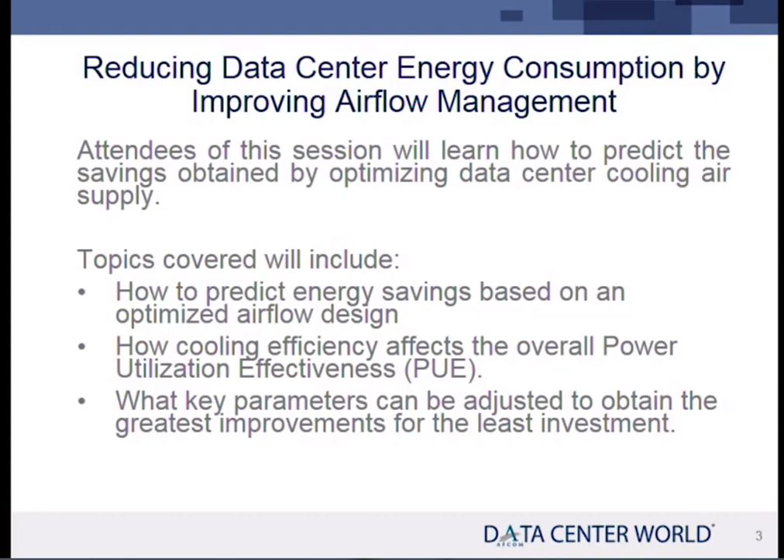Even in liquid systems, there's airflow. So, at some point, particularly with rear door heat exchangers, there's airflow. So we're going to be talking about airflow today. We're going to be talking about it as it relates to PUE. And I'm going to also be discussing with you a new specification called TC 90.4. 90.4 is a spec for energy efficiency as well, and it relates to PUE. We're going to talk a little bit about it.

A little bit of background on myself before we get too far. Paul Bemis. I have a background in mechanical engineering and electrical engineering. Undergrad mechanical, graduate work electrical. I was in the computer business for many years. I worked for Hewlett-Packard, electronics packaging first. Later on, parallel processing, high-performance computing. Ended up on the business side and ended up working in simulation software later in my career, which is where I am now.

So let's talk about first PUE. Most everybody here knows what it is. I'm just doing a level set here because I don't know where you all are with respect to understanding these things. PUE is a fairly good metric. It suffers from a few things. It is in the numerator total facility divided by IT energy. Total facility includes, of course, the IT equipment itself plus all the stuff extra to make that data center work. Okay, so that's the ratio.

I know there's a pointer here somewhere. Most of this cost. It did work. It worked a while ago.

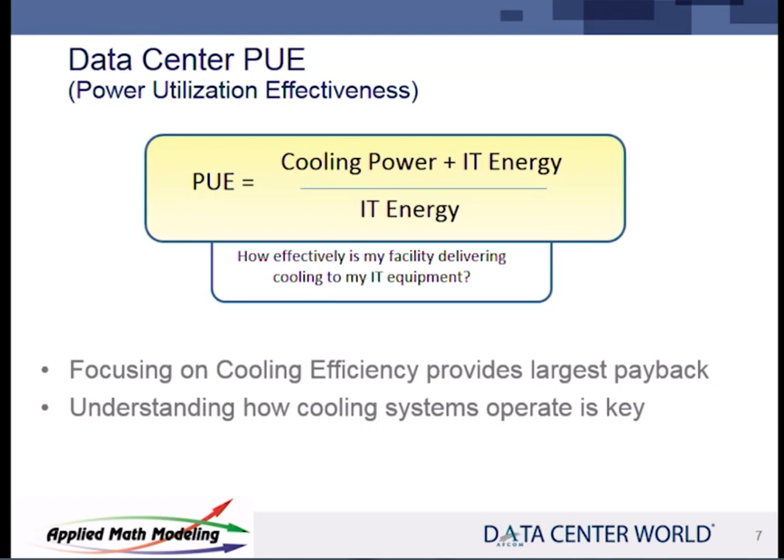So it's an interesting spec that's getting quite a bit of attention, I think, these days. But let's take this thing apart a little bit. Total cooling power equals fan power. These are the fans that are in the room. These are the fans typically, if it's a chilled water system, that are on the fan coils. They're often called CRAHs. They're air handlers, computer room air handler.

They're often also called CRACs, computer room air conditioner, although that generally is referred to with a DX system, so it's got the compressor in it. That's generally what people refer to. So it's the air handler in the room, plus whatever's in that room, the cooling load, which is all the IT load and any leakage from the PDUs and everything else, divided by the efficiency of the heat pump, coefficient of performance. How efficient is the heat rejection system?

So data center is fairly simple. It's heat in the room, and you're going to try to dump it back out. Now, what you'd like to do is do that at a ratio that's pretty good, right? A ratio that's pretty good is around 4. That means for every kilowatt of power that I put into the data center, it takes me about 0.25 kilowatts to pump it back out.

That's a good day. That's pretty good. I've seen them much, much worse than that. I've seen them at 1 to 1. For every kilowatt you put in the room, it takes another kilowatt to get it out. And airflow generally is the reason why. So the total cooling load includes the racks themselves.

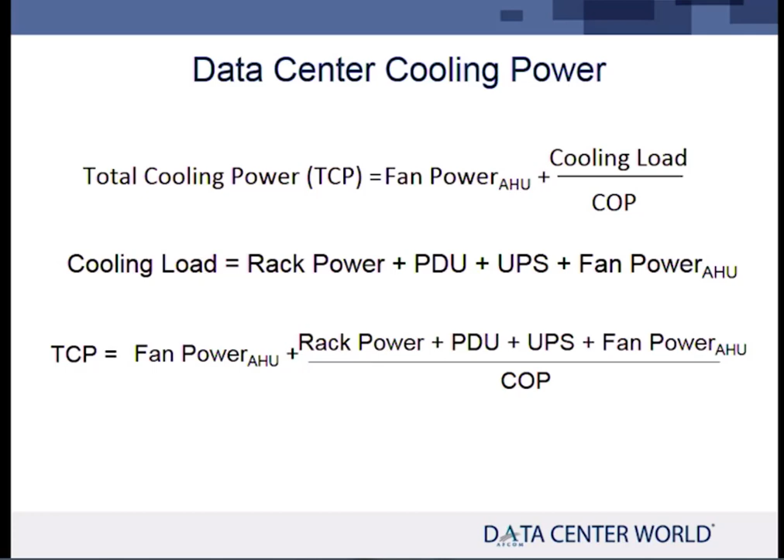Now in the TC 90.4 spec, they add a few other things in here as well. They're adding in, of course, any cooling tower fans. They're including pumps. So all things related to cooling go into that calculation. So cooling system efficiency is really shaft power. It's the power required to pump the heat back out. And it's usually done through shaft power.

It's done through a mechanical pump. It's done through a compressor. That's generally how it's done. Whether it's a DX unit or it's a chiller, it's mechanical. It spins a shaft, that drives a compressor. The coefficient of performance is how efficient that chiller is.

Now, you'll see chiller efficiencies in documentation listed kind of funny. They go kilowatts per ton. I love this thing, kilowatts per ton. Oh, can't you give me the same units? Right, because you convert a ton to a kilowatt. It's a ratio about 3.517, something terrible, right, that you can convert it. And then it's kilowatts per kilowatts, and that is the coefficient of performance. And generally, as I said, on a good day, they run about 4.

If they've got economizers, of course, they can be much higher than that. And they are not a constant. It does vary based on outdoor air temperature. It varies based on wet bulb temperature and things like that. So it varies as a function of time. It is not a constant, although you can develop an average for a year if you measure it. And generally we have to make some assumptions somewhere, so we work with an average COP.

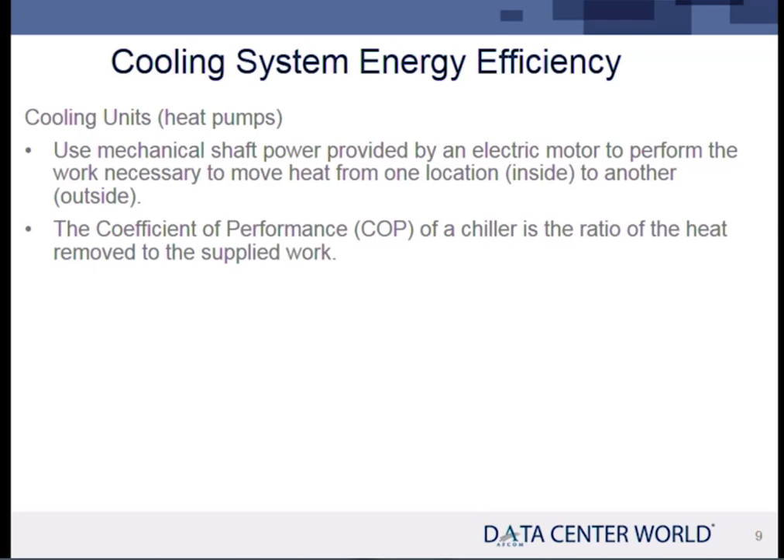So for most data centers, I find they run in the range of 2 to 3. If you look at that TC 90.4 spec, they have something they call the MLC, mechanical load component or calculation. It's really the inverse of the COP is what it is, and it's a system level COP. In other words, if you look at just the chiller number alone, it's a best case situation.

Kilowatts per ton. You look at the chiller spec, you say, well, it's got a ratio of about 3. The COP is 3 or 4. Well, that's under a laboratory test. That's under the best of conditions. And it's not a system level number. In other words, it doesn't include the water tower pump. It doesn't include the pumps pumping. It doesn't include the fans.

So what we're trying to get at really here is the overall system efficiency, the overall cooling system efficiency for your specific data center. That's really what we're after, and that's what they're chasing with TC 90.4. So it's a good specification. I think you're going to see more from it. But at the end of the day, COP is just the amount of work required to dump heat. It's just a ratio.

It's true for all devices. It's true for your refrigerator. It's true for your air conditioner. It's true for your data center. Coefficient of performance is something you should get a feel for. You should try to understand what yours is at your data center. It's fairly easy to figure out because you can go to your UPS and see how much load you have going into the room, at least the IT load going into the room.

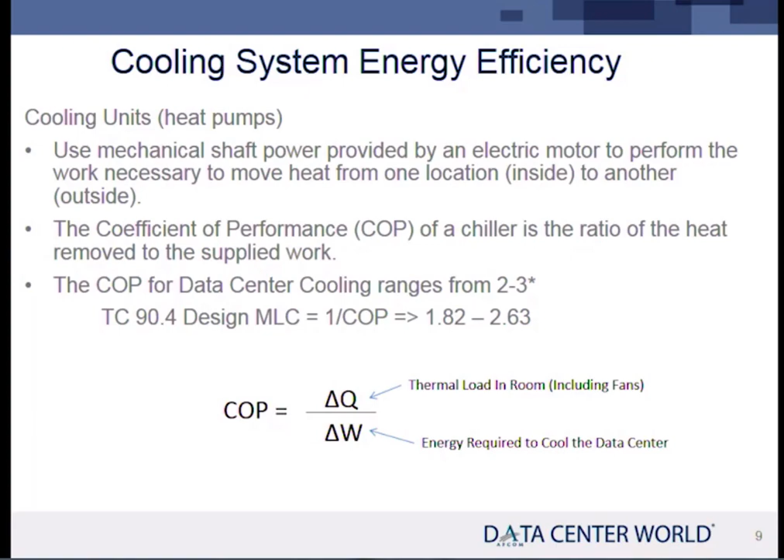So it's important to kind of understand where you are with respect to efficiency in your own data center. And the guidelines that TC 90.4 put in place give you, as I showed here, a ratio of 1.8 to 2.6. It's not too bad. Pretty close to the average that I see in data centers normally.

Okay? Now, the reason that it's important that we talk about airflow is because it influences chiller efficiency. The chiller is most influenced by return air temperature because it's trying to dump heat to the outside atmosphere. And therefore, its temperature to dump needs to be higher than the outside atmosphere. And the bigger the difference, the better off it does. Heat exchangers work that way. They're more efficient when the delta T gets higher.

It's not completely linear. I've been chased around on this before. But we have to make some assumptions. And for all practical purposes, you can assume it's fairly linear. You're going to get about 3.5% efficiency improvement in your chiller for about every 1.8 degrees Fahrenheit. Those are tough numbers to remember. But you can think of it as 2 percent per degree. All right? And it's fairly flat in the range that we're talking about.

So if you can raise the set points of your data center, supply air temperature in particular, which makes the return air temperature higher, you're going to get more efficiency. If you raise it about 10 degrees, you're going to get about 20% efficiency improvement in your heat rejection system. It's about where it ends up being. Okay, so it's important to be able to raise your supply air temp.

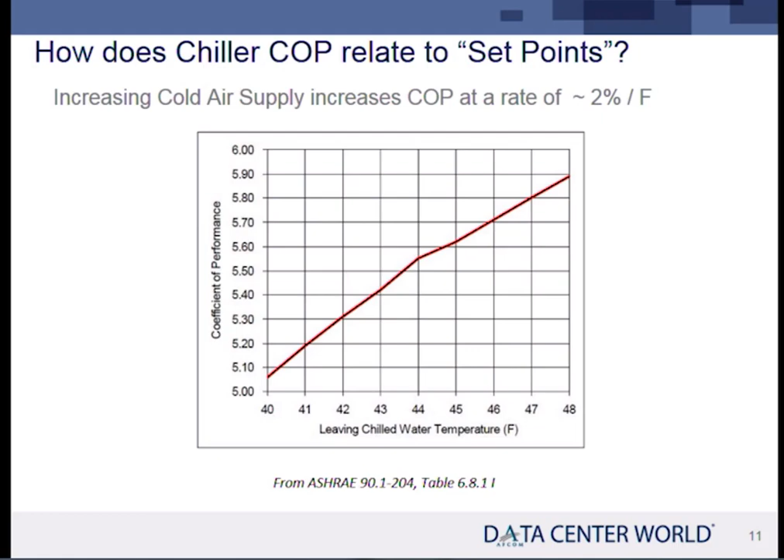So the first question you think about when you say raise supply air temp, am I going to have hot spots? Now the only way you'll know really that you're going to have hot spots is to model it, is to try it, have a mechanism for trying it out. And I am an advocate of modeling. I'm in the modeling business because it's airflow.

And managing that airflow and knowing where that air is going is very important to a couple different things. We talked about the heat exchanger, but also hot spots, getting the air to where it needs to go. You may have enough air coming out of the air handlers, but you got to get it to the right place if you're going to have it improve the efficiency of your center and if you want to try to raise the supply air temperature.

So a couple definitions here. Bypass airflow is too much air coming from the air handlers and it goes right around the rack. It doesn't go through it. In a perfect situation, you only want to deliver the amount of air necessary in order to cool your IT equipment. No more, just enough. Okay, and they have a ratio for that they've come up with called RTI, the Return Temperature Index. The amount of air being supplied should be equal to the amount of air that the servers want or need.

And no more, because if you have more, it's going to blow by the top, it's going to bypass, it's going to go back to the evaporator, and it's going to reduce the efficiency of that heat exchanger because the return air temps are too low. You want them high. You don't want to cool off the return temp.

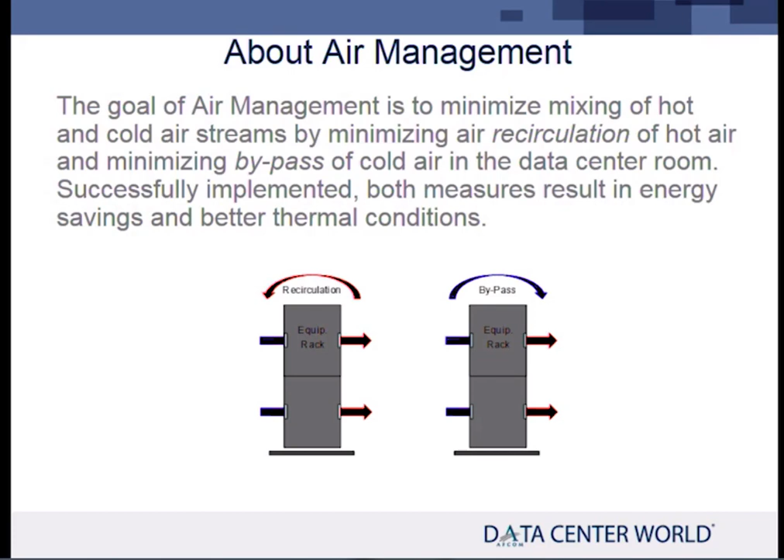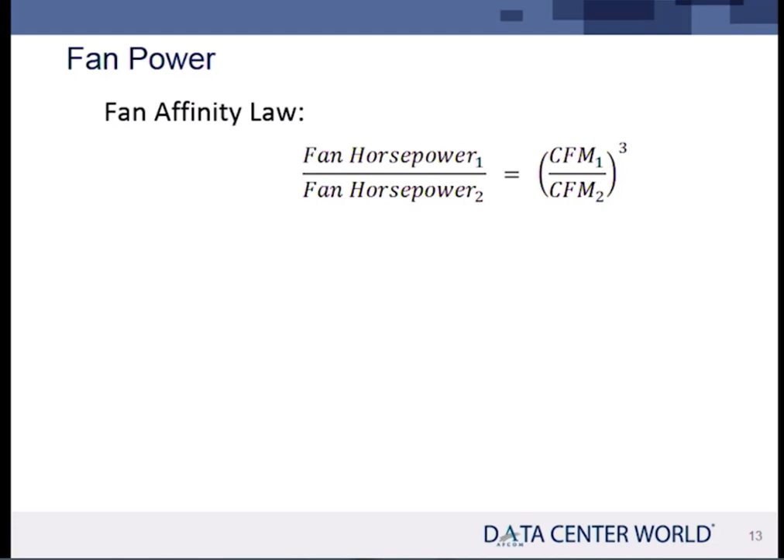Okay? So now the other thing to remember is the affinity law, or sometimes called the fan law, a well-known relationship as well. Specifically, the amount of energy required to drive a fan is related to the RPM of the fan cubed. In other words, the relationship is cubic. That's a big jump. So by reducing the amount of air going into the room, I get two benefits. One, my return air temps go up, which is good for the heat exchanger and good for the heat rejection system and improves the efficiency of it. Number two, the amount of energy required to drive the fans in the room drops by a cubic relationship. Well-known, understood fan law relationship here.

So if you reduce the fans by 20%, you reduce the energy that's required by 50%. Wow, that's a big hit. That's a big number. And this is where variable speed fans or EC modulated fans have become very popular because you can now begin to move the fan number down. For many years, this was a constant. We were stuck with what we had, and it didn't work very well.

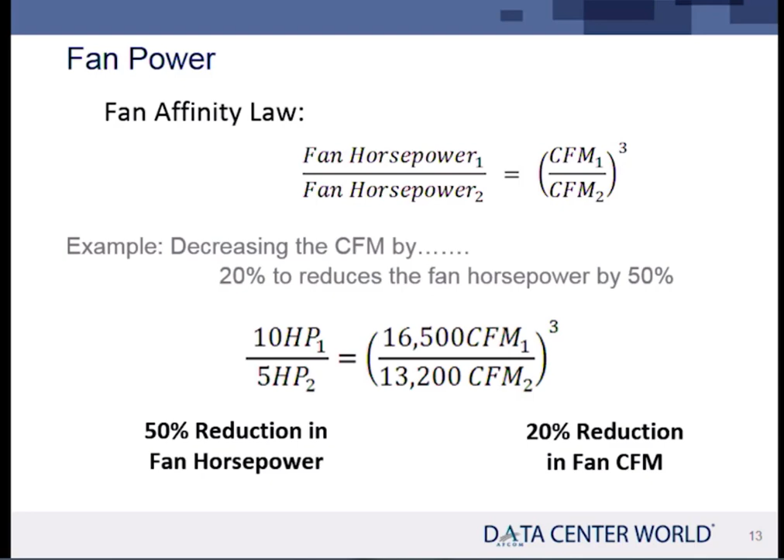Nowadays, the opportunity for EC fans or direct drive fans that can be modulated so that their speeds can go up and down based on a sensor can improve your situation greatly because it'll save you money in fans and also increase your return air temperatures. These two factors, the amount of air entering the room and the temperature of the air entering the room, are the two key parameters associated with saving energy in any data center, whether it's old or new.

Can we conclude that in an existing data center, replacing a normal analog fan with an EC fan unit, power consumption by that particular cooling unit will reduce by 50%? You can't assume it, no. The question he's asking is, if I move to EC fan and variable speed fan, can I assume energy savings? No, because you haven't yet dealt with the issue of air management.

You don't know if turning that fan down is going to cause problems with that server down at the end of the rack row. You don't know that because air has to get to that server, and that's an issue of trying to determine how to get it there, okay? So we'll talk about that a little bit more with respect to air management. But just changing them to variable speed fans isn't the answer.

And I've been in data centers where they've converted it all to variable speed fans, and I walk in and they're all running full tilt. They're all screaming. And I feel bad for the people who paid the money to do the conversion to the EC fans because they're not getting their money's worth out of it, because they didn't deal with the issue of airflow management. They were sold on this idea of saving energy, but no one ever followed all the way through to do the air management part.

Okay? So I mentioned earlier, rule of thumb, 125 per kilowatt.

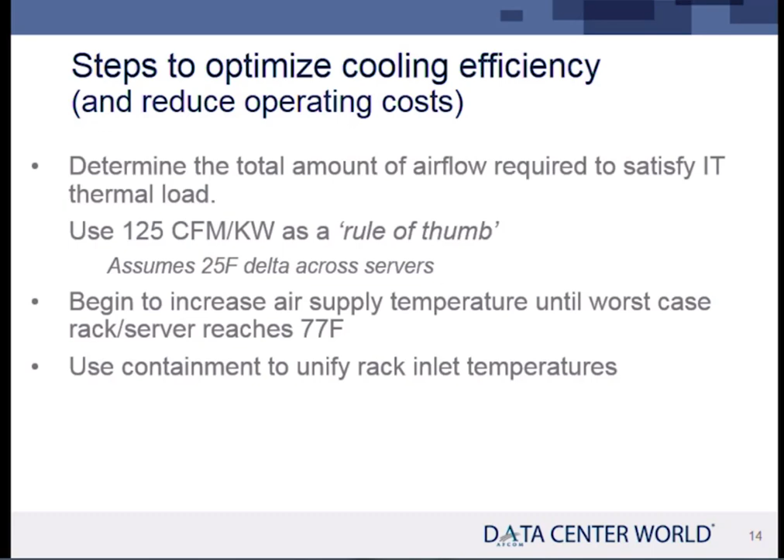Jeff's right. That's because PUE is not a great metric for energy efficiency in a data center. His point is that the fan in the PUE number, both in the numerator and denominator, is IT, and in the IT number is the fan, which I always wondered about too. What's the fan doing in there? But it is. Okay, so 77 degrees is really where you want to go. Using containment does help. It is not a panacea. I do another presentation called Containment is not a panacea, because it can bring its own set of problems in, particularly if you mix some rack rows with containment and others without it. I've seen that done a lot.

So we're going to do analysis here. I'm going to take you through a couple of examples. And the reason I'm doing this is to show you the mathematics of how to do this and show you the gains that can be made from it. And the other part of it that I think is important is that I'm going to show it to you at both full load and half load.

The other thing that ASHRAE 90.4 does is it gives a requirement to set the specification of energy efficiency at full load, which everybody designs for. I work with a lot of design build firms, and they're all working at max load. In other words, when I design a data center, I have to make sure it'll handle peak load. Great. Day one, I don't have peak load. Day one, I've got 10%, 20%. How efficient is it at 10% and 20%? No one's ever done the math. Answer is, it's not very efficient at all, right? Because the energy required to drive that chiller is going to be still quite high compared to the IT load.

So it's going to be pretty poor. So in the ASHRAE 90.4 spec, they have a 50% requirement in there. You have to test it at 50% load in addition to 100% load to see how it behaves itself, which I think is a good idea.

So we're going to have a 1 megawatt data center here. It's going to be natural convection with ceiling plenum return. We're going to do a baseline run on it. Always validate your models if you can. This is great to do on existing data centers, is go in and make a few samples to make sure that the model you built actually represents the real world. But in many cases, you haven't built it yet, so it's the best tool you have.

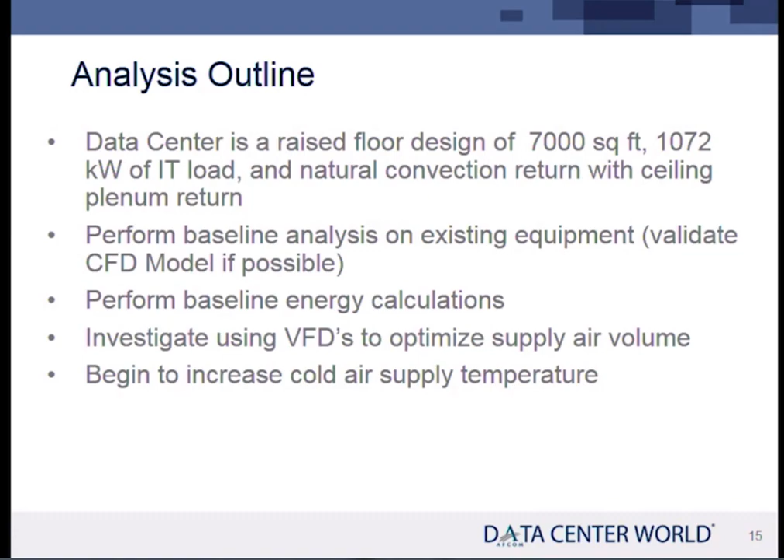The reason I point this one out is I've seen these perform pretty well. I've seen these kind of data centers with that kind of design operated at PUE of around 1.3, 1.25. Not too bad. And that's probably the most cost-effective solution you're going to get without going to full containment. And like I said, full containment starts to bring other issues in, pressure issues and airflow issues within the containment itself.

This one has no issue. It's really convective hot air. The hot air is coming out the backside of those racks and we're using buoyancy in our favor here. It's floating up into the ceiling and being sucked out. Pretty nice design, low-cost design, economical. Here we've got a load of about a megawatt, 160 racks. The rack demand, 134,000 CFM. Again, total IT load times 125 per kilowatt.

Is it perfect? No. But good engineering is based on calculated assumptions, right? We have to make some assumptions. Otherwise, we can't move forward. And then we test our assumptions and see if they're valid. 125 per kilowatt's pretty good. It's not perfect, but it's pretty good.

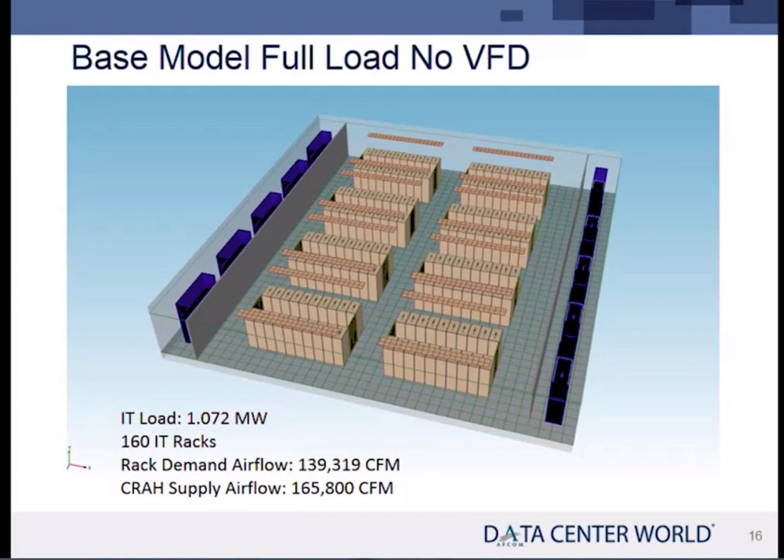The supply flow rate in this case, 165. So you see, I already have more air than I really need. I have 139 that I need for the racks. I'm delivering 165. So I know my ratio, my RTI ratio, is going to be below 100. It's not a one-to-one match, right out of the box.

Now, here I'm also beginning to look at energy. I want to know how much those fans are delivering. This is a Liebert. These are CW114s that I'm using, not 106s, sorry. And you can go to the spec. You can get this information online. Find out what your air handlers are running at.

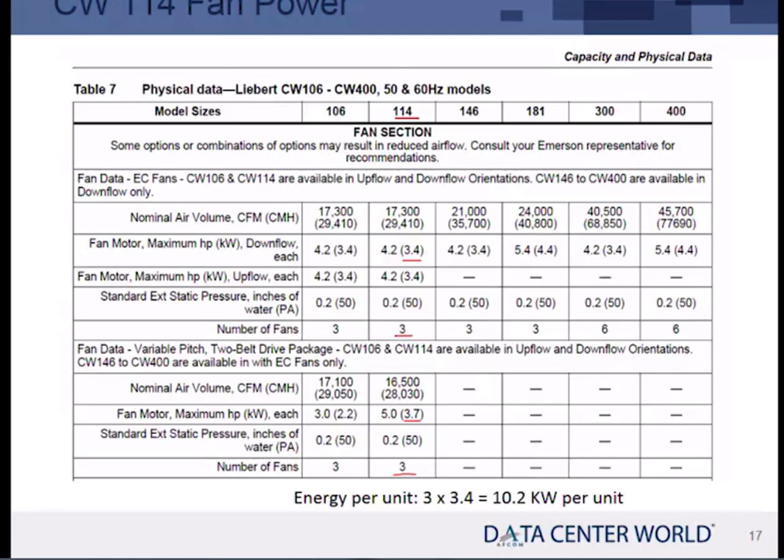In this case, we have 3 motors, and they're generating 3.4 kW per motor. And there's 3 motors, so I've got 10.2 kW per air handler. And you can enter that in as your start point, times the number of air handlers, of course. So there's quite a bit of energy going towards cooling itself.

Now this is some output from the simulator. I'm going to read this to you because it's pretty small. My RTI here is 84. That means, again, in the base case, I've got too much air coming into the room. That's when they're all on full tilt. All the units are running full. Too much air. Therefore, my ratio is below 100.

Now, I know I've got too much air. The problem, as I mentioned, it's going to cool off the return air to the heat exchangers, and that means my chiller is going to be less efficient. And the other 2 metrics that are popular if you take training like DCIM training, DCEP training, you will learn about these other 2 metrics, RCI high and low. RCI high is, do I have any hot spots? It's at 100%.

I don't have any hot spots. So there's no hot spots in this data center. I'm certainly cooling it well enough. But if you look at the RCI low, that's looking at the low temperature metric. It's at 21%. It's too cold.

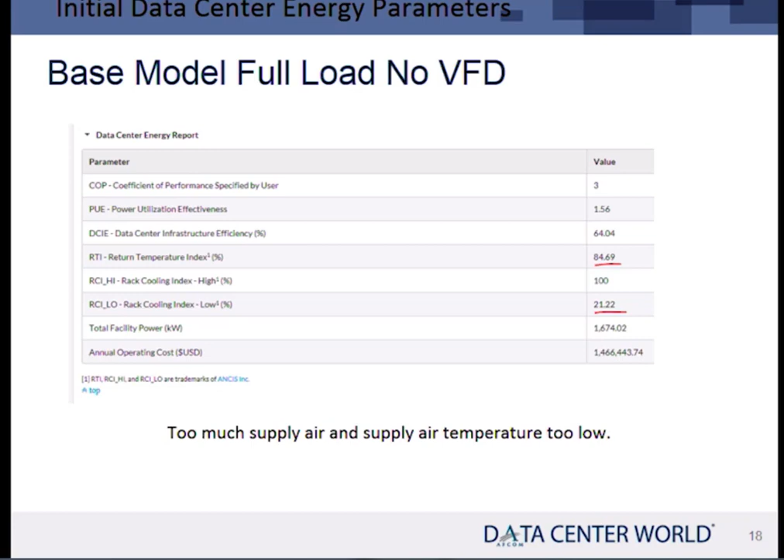I find a lot of data centers like this. Too much air being delivered at too low a temperature. And this is making the chiller go crazy, or the DX unit, or whatever it is, right? Because it's unhappy. It's not getting hot air back. It's still trying to deliver cold air, and it's working itself to death. That's a very common situation. Too much supply air, and supply air temperature is too low.

This is what the room looks like. These are rack inlets. They are colored in accordance to conformance to the ASHRAE spec. The ASHRAE spec for a recommended temperature inlet, which maxes at 80.6. And 64.4 is the minimum. So these should be all green, right? But they're blue because they're too cold. They're failing on low temperature.

Now, that doesn't kill your IT equipment because running them cold doesn't really hurt it, but it hurts your chiller and it hurts your heat rejection system. It means the energy consumption for that data center is huge because it's trying to deliver really, really cold air.

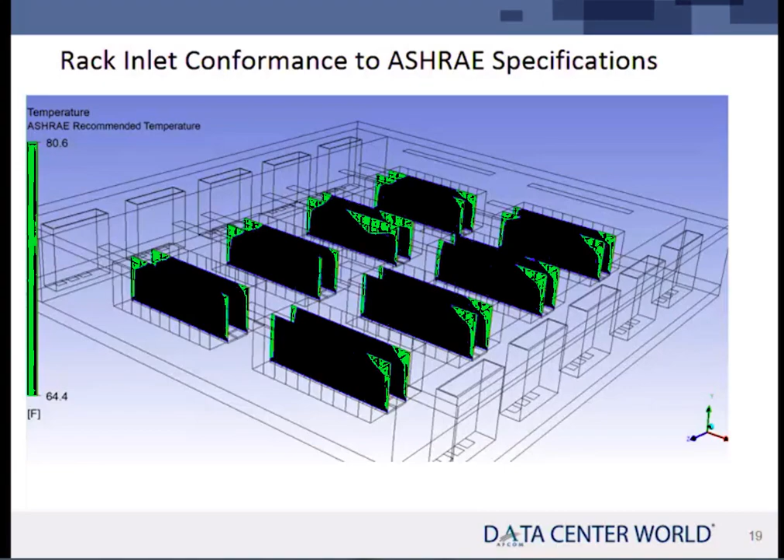The contours that you see here are not uncommon. We're delivering air through the middle, through the perforated tile. This is a raised floor data center. And you see the cold air coming up out of the floor, and as it gets to the top and it gets to the corners, it dissipates, and you don't have quite as much cold air there. So you do see a contour of temperature. That's a temperature plot. I wanted to also show you airflow coming back to the cooling units.

Now, these are what we call path lines of supply. They're coming out of the floor. So the thing about this kind of modeling, this is CFD modeling, computational fluid dynamics. It's used extensively in aerospace and the automotive industries, and we're using it here. And the good thing about it is it allows you to visualize the air. It allows you to physically see it.

And what we're doing here is we can see the air coming up out of those tiles and going up, and it should stop right at the inlet of those servers. It shouldn't go any further. If the air balance was perfect, if all I was delivering is what the system needed, there would be none of these returns going back. But you see they are. There's a few going back. I'm over-delivering air. I'm getting bypass airflow, and it's going back and it's cooling off my heat exchanger. And that's reducing my efficiency.

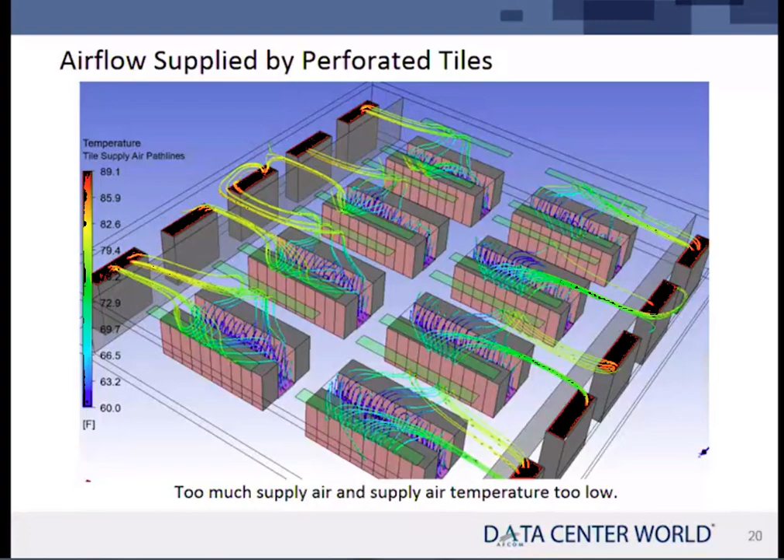So a perfect picture would be none of these returns going back, none of these yellow ones. And by the way, in yellow, I'm showing here a return temp of around 79 degrees, 80 degrees. Way too low. Remember, if my supply is 60, my return should be 80. If my supply is 70, my return should be around 90. There should be a 20-degree delta across the rack, if not more. It should be around 25, to be honest. The hotter the return, the better a heat exchanger performs. So we have too much supply air, and our supply temperature is too low.

So first step we do, implement VFDs. It's your point. Let's get control of the supply air so we can modulate it based on the amount the IT needs. This is a good thing because in the early days of your data center, you don't have a lot of load, but maybe over time load goes up. You'd like to have a way to scale up and down the cooling capability and efficiency, and so VFD is a good way to do that.

We're going to put temperature sensors in place on the racks to modulate the VFD. I like temperature sensors on racks. A lot of people do put pressure sensors under the floor to drive the VFD. And then they try to dial the floor pressure to be a certain level. This is a very common technique by people who put in air handlers. Use pressure to modulate the fan. The problem is the pressure is a proxy for temperature. It's a substitute. Really what we're interested in is temperature of the rack inlets. So what you really want to do is use temperature, which I have done in this case.

So I went ahead and did a run. This is a 1 megawatt data center, and the PUE dropped from 1.56 to 1.5. The RTI went to 90.28 from 84. It got better.

The RCI high stayed at 100, which means I still have no hot spots, but my RCI low is still 21. I'm too cold now, but at least I got the airflow a little better balanced. And by the way, the predicted cost dropped by 50 grand a year, just putting the VFDs in place and scaling them down a little bit. Okay? So things got better just from putting the VFDs in place, to your point.

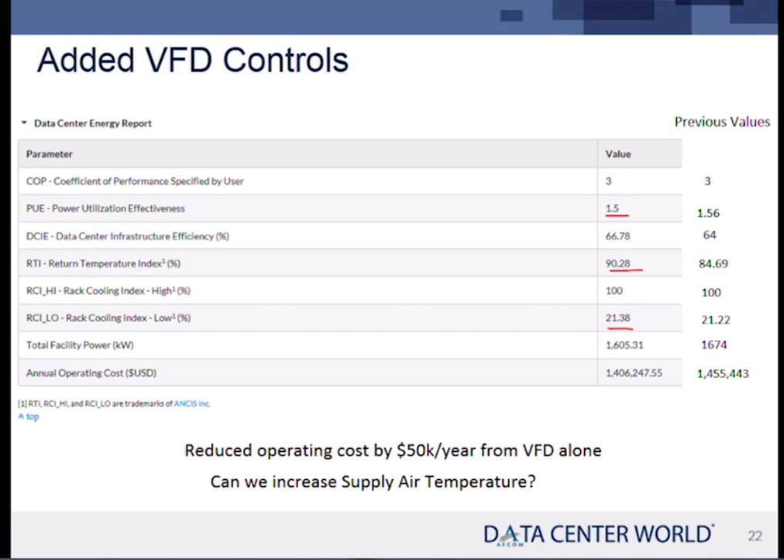So we don't have air management problems yet here, but we don't really know because we haven't turned up supply air temp yet. As you start to turn up supply air temp, you're going to see things start to get a little bit worse. So here's what they look like now. So we were able to save 50K a year from putting the VFDs in place. We got better efficiency just from fans alone.

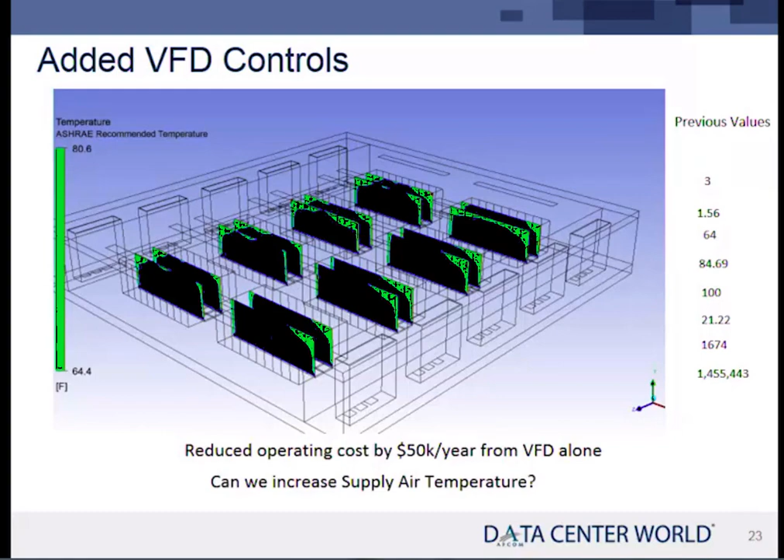Now the next step you always try to take is, can we begin to raise supply air temp? Using a modeling tool allows you to do that because you can try these what-if scenarios and experiment without the downside effect of burning up anybody's equipment. Doing it in the physical world, trial and error in the physical world can be a little more risky.

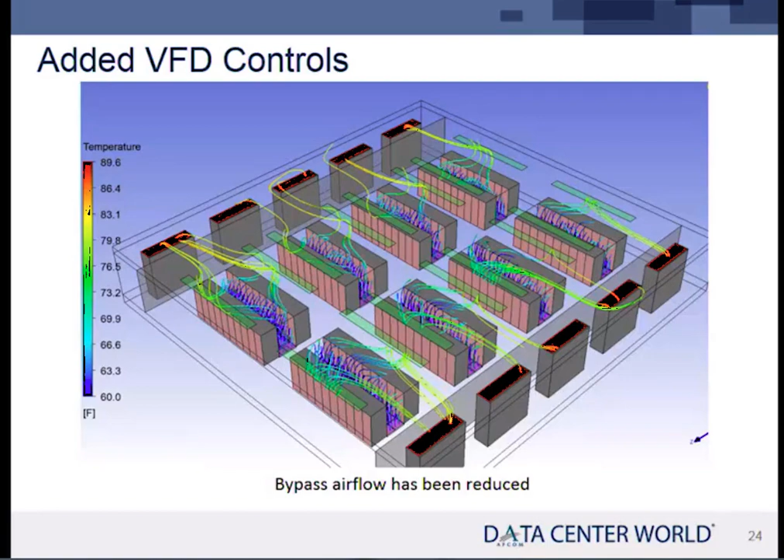Now here you see in this plot, this is the returns again, and you see there's fewer of these. There's still a few, I'm not perfect in my delivery. So I got a few path lines going back, but certainly bypass airflow has been reduced and things are in much better shape. Next step, can we increase supply air temperature? And if so, what happens? So here we're going to increase supply air temperature by 8 degrees.

Generally the way you do this in the real world is you step it up just a little bit at a time, maybe a degree every couple days, start to walk your way up and test and measure or wait for alarms to occur. But what happens here in the model is that as you begin to increase the supply air temp, because we're modulating it off temperature, in this case we use 3 temperature sensors on each rack, one at high, medium, and low across all the racks. Another substitute, if that's too expensive, is to put them across the top, because in this kind of design, that's usually where the issues are.

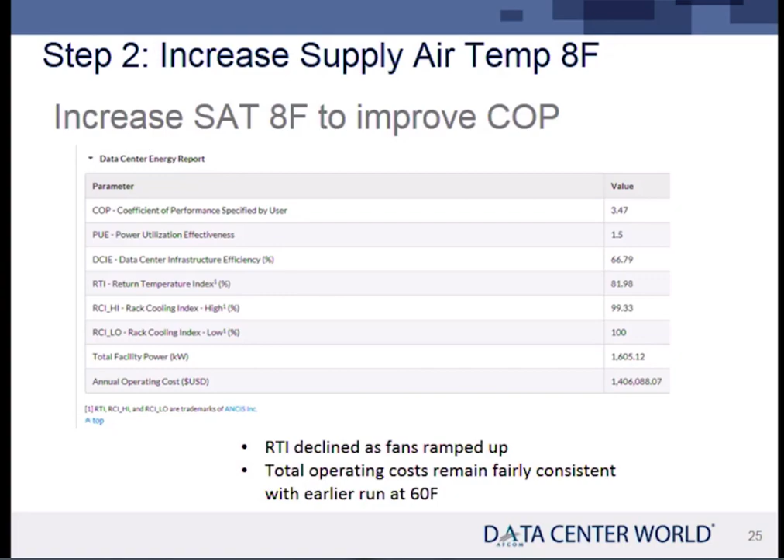But here we were able to increase supply air temp by 8 degrees, and the RTI began to go down a little bit because the fans started ramping up a little bit. So the total operating cost here remained about the same as the earlier run because the supply air temp went up, but the fans also ramped up and sort of counteracted that. But here's where we are.

Racks are now all in conformance. They're within the specification. They're all green. A little bit of red right in those corners. That's a little bit hot, but you need not worry about it because generally you don't put servers up there in the corners like that. So that's generally okay. So what we were able to do here is roughly save $60,000 a year on a 1 megawatt data center by putting VFDs in place and getting the airflow balanced and also increasing the supply air temp just a little.

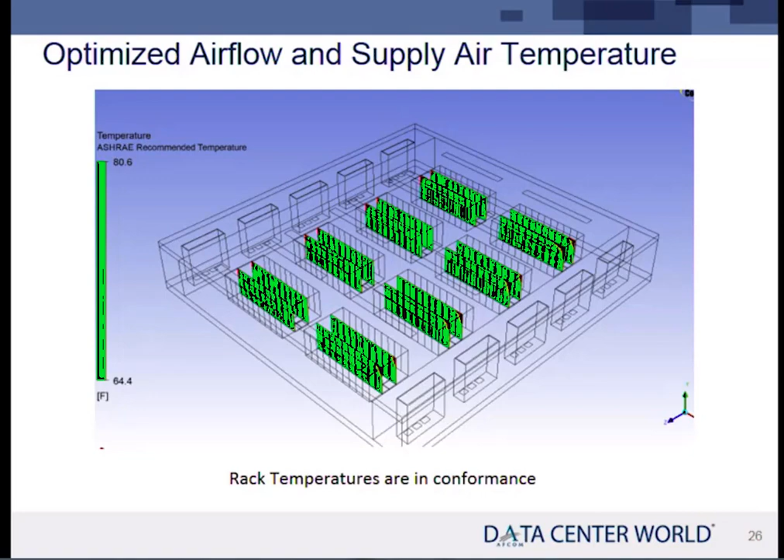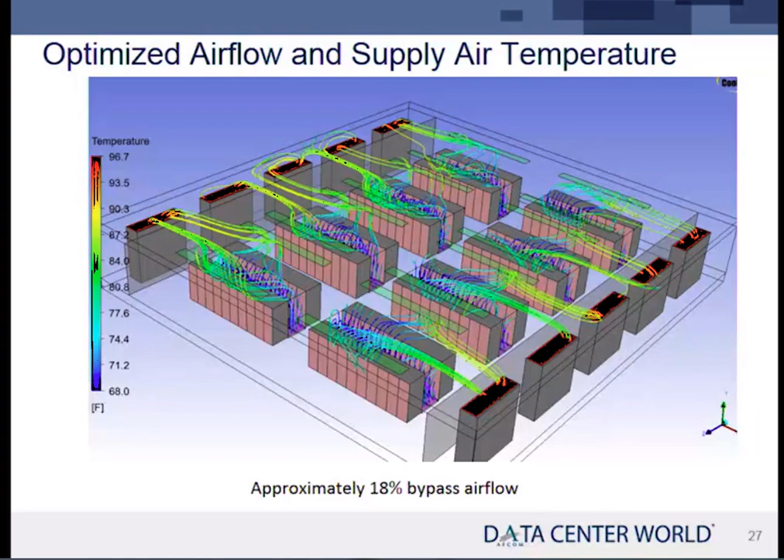And there's our final plot. You see there is some bypass airflow, about 18%. It's about as good as you're going to get without going to containment. If you were to contain it on the hot side, you could eliminate that bypass airflow and do a little bit better, or contain it on the cold side. Either one would work. In this case, I didn't do full containment. I just wanted to show you because not everybody has full containment, and furthermore, as I said, that does introduce some variables there too.

So what we did, just in summary, is we took 3 steps. We first just added the VFD, so here's the base set of values right here. Our original cost to operate was about $1.4 million a year of operating cost. We put VFDs in place, it dropped to 1.40. We saved 60K, and then we brought up supply air by 8 degrees, and it remained about constant because the heat rejection system got more efficient, but the fans came up a little bit. Okay, so now it's a balanced system.

Question? On the thermal side, which is a better containment?

So the question is, what's better, hot aisle or cold aisle? And the answer always is, it depends, right? It depends. I prefer hot because you want to get hot back to that heat exchanger. That heat exchanger wants a very, very hot return. And if you do give it a hot return, the chiller is going to be better, the maintenance is going to be lower, you're going to have better MTBF.

Yeah? So, in addition to that, I prefer hot aisle containment because if you do cold aisle containment and your cooling quits, you're done, right? You're cooked, literally. You're cooked. But if you have hot aisle containment, then all your common area becomes kind of a storage location for cold air. That's right. He's absolutely right. Gives you a little bit more runtime. He's got more volume. What he's talking about is volume. The ability to share somebody else's air. The cold aisle containment is a restricted volumetric area.

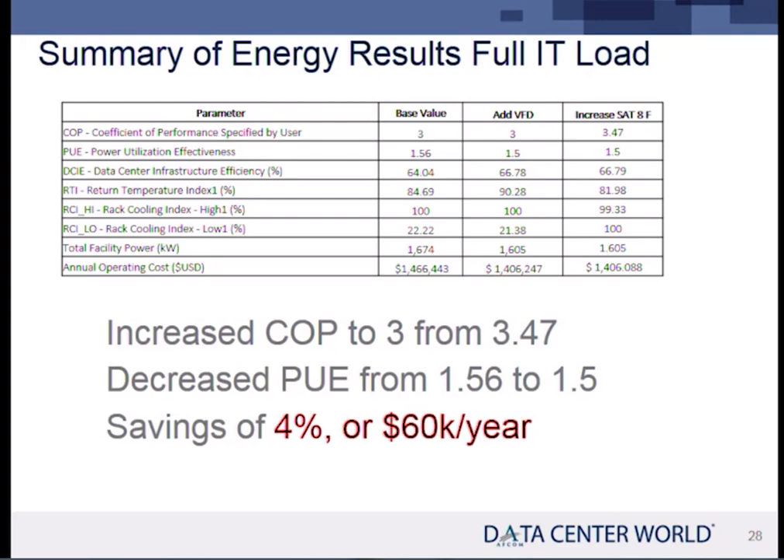Do you have a model that didn't have the end-row containment? No, I don't have one here. I mean, it's easy to model. You can take them off. Yeah. The great thing about a modeler is it's quick and easy to do.

All right, so now what happens at 50% load? The reason I'm pointing this out is because prior to this point, not many people did 50% loads, right? When I work with design build companies, they all want to run it at 100%. Hey, let's build it for a megawatt. Let's build it for 10 megawatts. And guess what happens on day one? It's got much less than that in there, and the chillers are all screaming. So this is a 50% load, and we're going to design it for N+1. The question I'll simply ask right now: is it better to run 6 air handlers on this or 10?

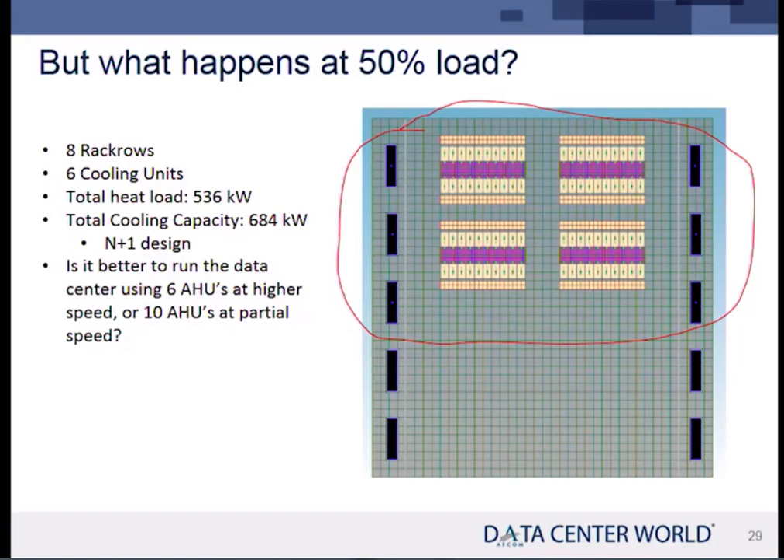We've got too much air, supply temp too low. This is generally every time I enter a data center I see that. The supply air volume is too high, and the supply air temp is too low. Yeah?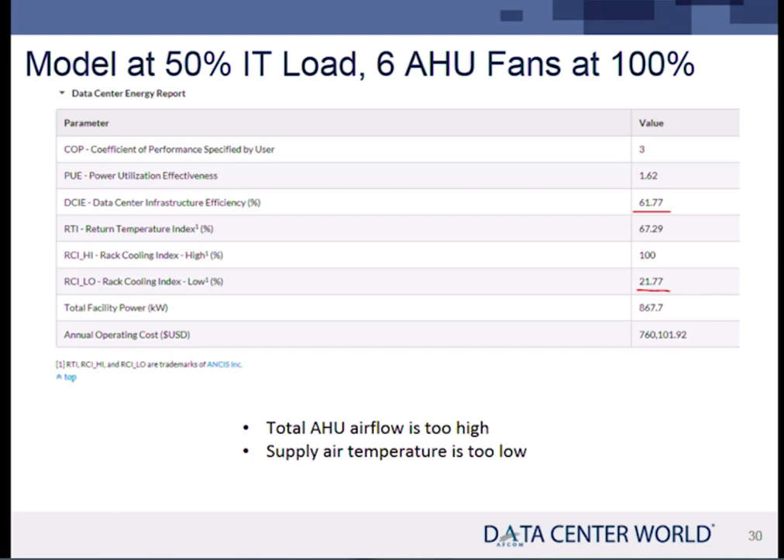I did not in this case, and I probably should have. Yep. So, you know what? I guess I did, because I took them out. They're not there. So yes, I did. I couldn't remember. But here, same case, way too much return air going back there. This is just a visual representation of it. With just the end caps, Paul? That is with the end caps. Yeah, they're in place. They're transparent, but they're there.

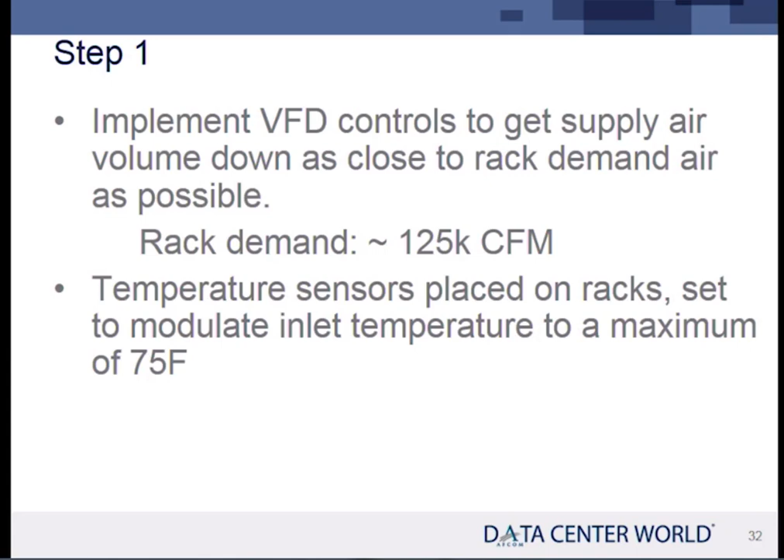Again, to know how much air you need, rule of thumb, 125 CFM per kW. Fairly easy math to do. I put temperature sensors at 3 points on all the racks, and I set the control system so that it triggered off max temp. So wherever it measures max temperature, that's the sensor it's going to use to drive the VFD to the proper level. And immediately things get better.

So what happens here is my RTI is now 97, got much better, closer to 100. Remember, the rack requirement is in the numerator, so you want a higher number. 97 now, that's pretty good. RCI high is 100, that's pretty good. RCI low, 22, 23. Yeah, too cold. So now I've got the airflow right, but what do I do about temperature? Can I drive temperature up?

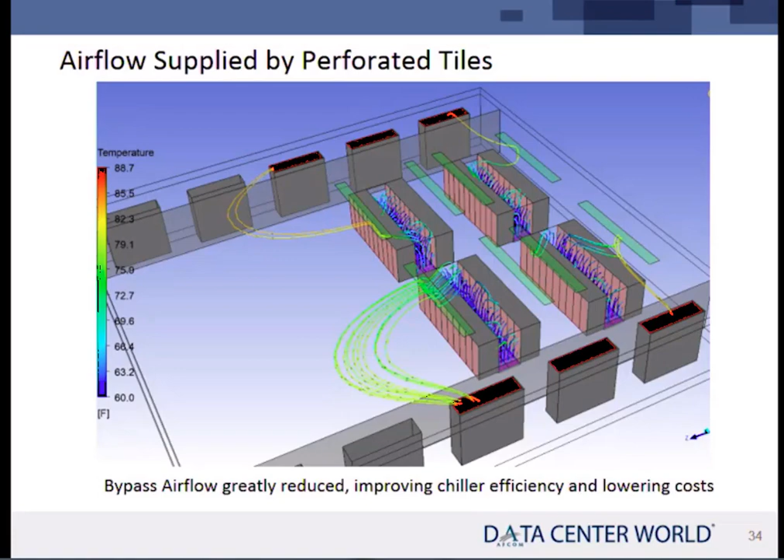So using the VFDs in this case saved $100K a year in operating cost, by the way, assuming a cost of electricity of 10 cents in this particular case. So then you start to modulate. Now in this case, I'm using just 6 units. You see them right there, 3 on a side, modulating those fans and driving that system. Getting a little bit of bypass airflow there, not a whole lot. And things got better.

So we dropped down to 653 against 669. So running all the air handlers, that's the question we had, with 10 AHUs, air handler units, actually lowered the cost of operating this data center as compared to 6. And that's just because of the fan law. So running 10 units at low speed costs less than running 6 units at a higher speed. Just like shutting units off is not as efficient as running them at low speeds.

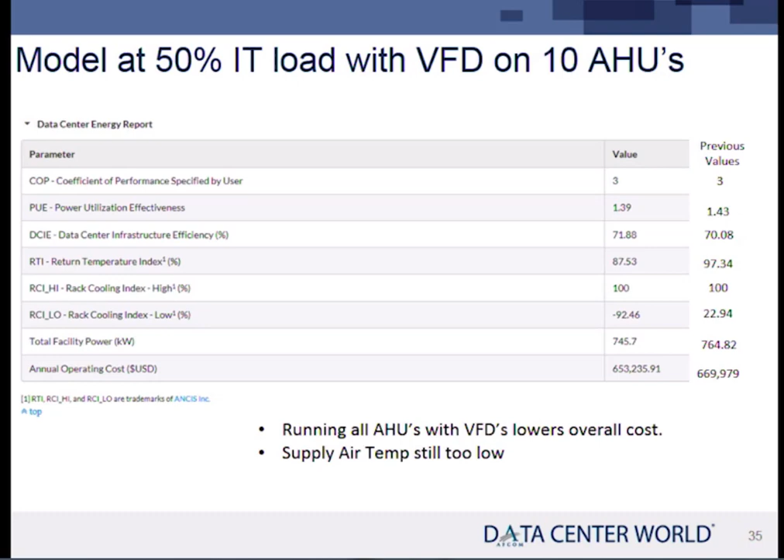Because the first thing you think of is, let's turn these units off, we're not using them. But because of the fan law, it actually turns out numerically that it's less energy to run them low than it is to shut them off. So better to run 10 at low speed than run 6 at a higher speed in this particular case. Paul? Yeah?

Does it make any difference if you partition off, in your example, the subfloor where there are no racks, not taking into account leakage through the floor? No, it doesn't do any good. Doesn't make a difference. That's what I thought. Yeah. So the question he had is subfloor partitioning. I'm not an advocate of subfloor partitioning, and it wouldn't work in this case. It wouldn't help, assuming, as he said, not a lot of leakage through those tiles.

Tiles don't leak too bad, by the way. The leakage on sealed raised floor tiles is fairly low if they're put in correctly. They're engineered to be tight, and as long as they're good against the walls, that's usually where the issues are. They generally hold up pretty well. Leakage in the range of a few percent, not too bad. So leaving it all open in this case worked better.

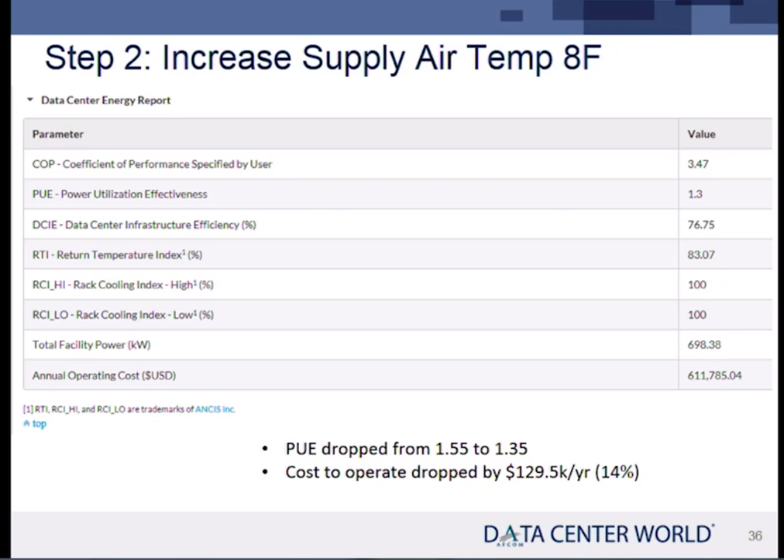If you start putting subfloor partitions in to try to manage airflow, the biggest problem is you forget they're there. Somebody forgets they're there and then tries to do something and it doesn't work and they can't understand why and it causes all kinds of issues. So engineered solutions that are good for one case but not for general cases tend to make me a little uneasy. Okay. So here's the result of the 50% load. We went with 6 AHUs first.

That's full speed, everything running. The cost to run it per year was predicted to be $760K, almost $750,000. And then we put in the VFDs, still running it at the same supply air temp. We saved some. It dropped from 760 down to 669, so we saved quite a bit of money there. And then we went to 10 AHUs, and we saved a little bit more. We went from 669 to 632.

I have to get close to see it. And then we raised supply air temp just a little. Now, when you go up on supply air temp, the fans start to come up a little bit because they're sensing max temperature. And so that ended up being a wash with respect to cost. We went from 632 down to 611. And that's because the efficiency of the heat rejection system went up, because it was getting higher return air temps again.

Now, I don't have an economizer in this thing at all. If I did have an economizer in this model, then all of a sudden it would be a great savings because that window of opportunity opens with respect to the number of days per year I get to use that economizer. So I would advocate probably for that latter case for that reason. Yes, that's true. It does depend where you are. Economizers do vary depending on location. But they are being included now in a lot of components, Liebert components and Stulz and so forth.

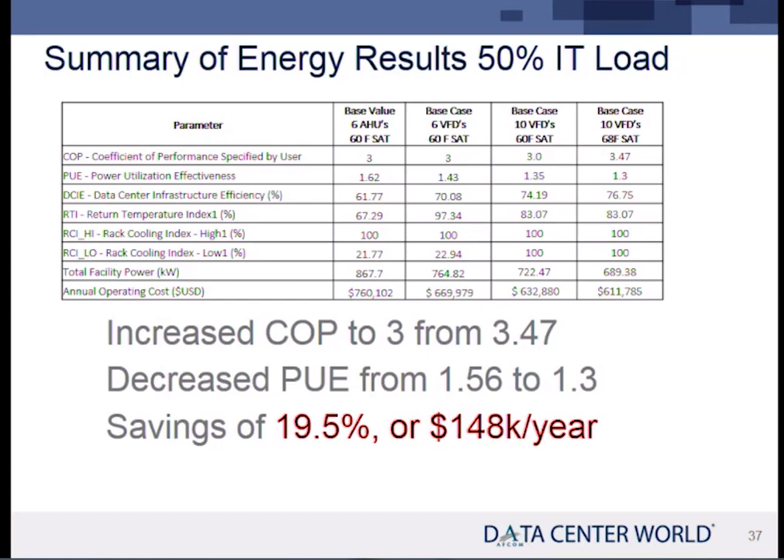So in this case, we're able to save 20%, $148K a year. Saving 20% on data center operation is a fairly easy thing to do. I know people in business like mine on the practitioner or implementation side, and they'll tell you they can go in and save you 20 to 25% through air management pretty easily. In fact, the LBL articles written quite some time ago talked about 20 to 30%. Airflow management is the low-hanging fruit. It's the easiest place to save money. Much easier than buying another air handler, much less cost, and can work very well. So, airflow management.

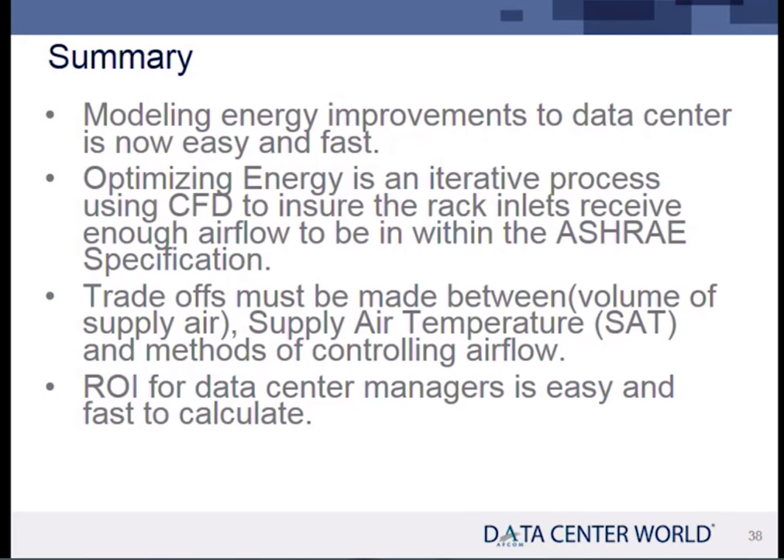I'll open it up for questions, just some summary slides here. Using CFD is really just a tool. It's a decision support tool. It allows you to understand the implications of change. What happens if I raise the temperature? What happens if I put containment in place? So it's a what-if tool or a decision support tool. It's not a panacea, it's just a tool. It helps. It's not perfect. It's not a forensic tool. Some people like to use it for that.

So 3 things you learned: how to predict energy savings based on an optimized airflow, how cooling efficiency affects overall PUE. It's kind of the elephant in the room. And what parameters do I look for? One of them is, what's the efficiency of your current system? Fairly easy to figure out. You know your IT load. Go look at how much the cooling system is pulling. Generally it's on a transfer switch because you want to keep that cooling system going in the case of down power. You can go measure it. Ratio those 2 measurements. If they're not close to 4, if they're 3, 2, or 1 to 1, you've got a lot of opportunity for savings with fairly modest investments.

And here I didn't do any hard containment. I did it on purpose. I wanted to show you that it can be done without hard containment. In fact, the first time I saw this, what they had done is gone to Home Depot and bought plexiglass with magnets on it and stuck it on the ends of those rack rows to keep from recirculating. It doesn't have to be elegant. And it worked. They were seeing a PUE of 1.35 in that room using exactly that design. Just letting the air float up into the ceiling returns, and modulating the supply air as best they could. So it can be done.